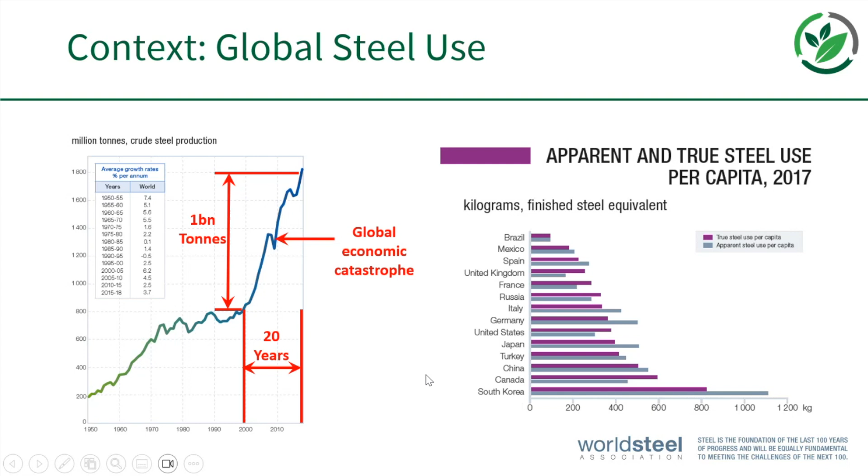And as we move into a transition to new technologies, we're going to continue to need steel as we embark on a whole series of very large infrastructure projects and to support new technologies to deliver the green transition as well. In the UK, that means that we're going to have a very sort of stable demand for this material into the future. There are, of course, then on the back of that, industrial developments.

So I've picked out, obviously, the very well publicised transformation of the Port Talbot Steelworks from an integrated steelmaking operation to an EAF-based steelmaking operation. And I think those of us who work closely with the industry also recognise that these sorts of transformations have been occurring in a lot of other jurisdictions well ahead of the UK, particularly the US.

One of the things that I've always said is there's never been a more exciting time to work with the steel industry. And there are a lot of opportunities for people to get involved and contribute to the success of that. Lots and lots of fundamental scientific challenges along the way.

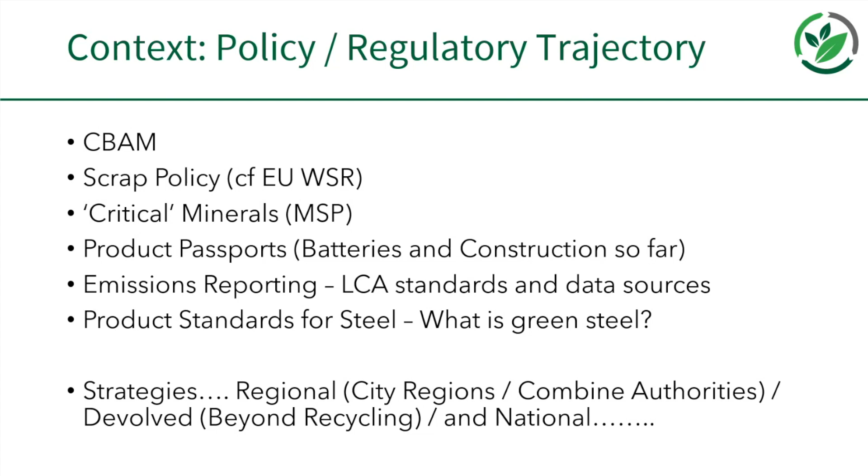But we will also have, and this is the critical thing, the UK Steel Strategy. I thought I would frame my talk in the context of this, because the UK Steel Council was recently reformulated and met this week. And the steel strategy will be completed by April, and I thought that deserved a sort of eek emoji, because to me that sounds like an incredibly complicated and detailed piece of work that needs to be completed extremely quickly. Obviously, people have been thinking about this for a long time.

And what I thought I'd do, having been involved in some of the prioritization and development of things that might be going forward for the steel strategy, is give you a sneaky peek of what that might look like. So there will be some subgroups developed, which will include some of us in the academic sphere, but also a whole range of other stakeholders from industry and government. And they will be looking at things such as, and I'm calling this indicative because I don't believe this has been published or finalised, procurement.

So that's looking at the whole supply chain for steel and how do we produce the products that customers need in the future. Raw materials, so particularly a focus on scrap, but also let's call them iron units, which could be DRI, or pig iron, or granulated iron, or the ore itself, of course.

Energy, so yes, availability, but critically what vectors we're going to use. So there is a clear move towards electrification within the UK, but we also need to consider the chemical vectors, and we're displacing a huge amount of chemical energy with electrical energy by moving from an integrated steelmaking process to an EAF process.

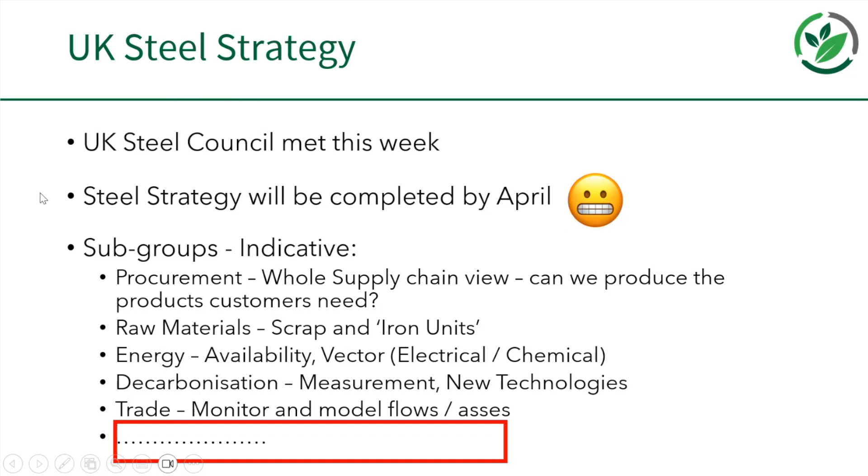So this is the sort of the context. And so what I wanted to think about was, well, if we look at these things of procurement, raw materials, energy, decarbonisation, what is it that we're doing in the academic sphere that's going to be able to contribute to that, and how will it fit in with whatever this published steel strategy happens to be? And we'll find out very, very soon.

So I'm going to draw on my experience of leading the SUSTAIN network. I'm very keen on pointing out that it is a network, so it stands for Strategic University Steel Technology and Innovation Network. And I've always been very focused on making sure that we bring together as many different players across the academic sphere as possible in joining this, and we continue to grow the partnership through new funding calls and things like this.

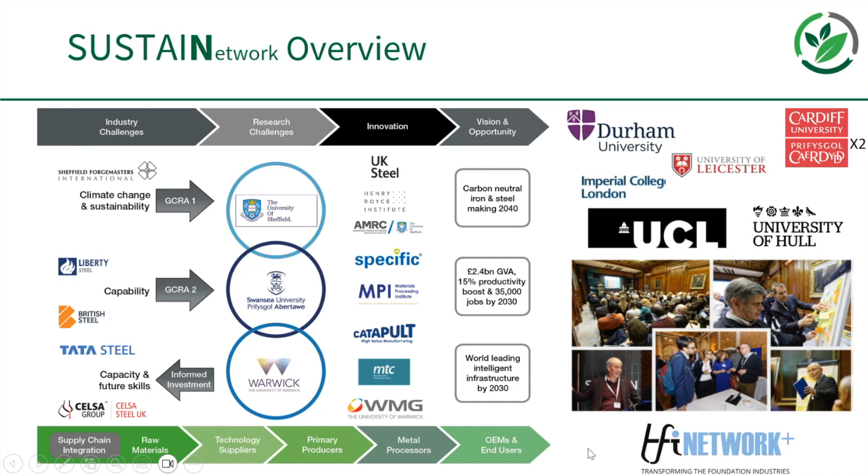So this is kind of what it looked like to start, but we've now engaged through a whole series of networking events and funding calls with a whole series of different other universities across the UK who have got valuable contributions to make inside this space.

To give you an idea of how we're doing that, we continue to fund new partners. We've just awarded, I think, 3 new feasibility studies. I'm going to struggle to remember exactly where they were funded off the top of my head because it's literally hot off the press, and perhaps I shouldn't announce it here, but we've just funded 3 new feasibility studies, 2 of which I know sit with new partners and new universities that we haven't worked with before within the SUSTAIN network.

And this is one of the things I'm most proud about within SUSTAIN, an early career researcher call, which is specifically to fund researchers who are not eligible to apply for EPSRC funding under other circumstances. And we have a whole series of applications which are currently under review. We completed the interviews for those, kind of similar to a fellowship process, at the end of last year.

And we also have a technology transfer fund, which anybody who has received any form of SUSTAIN funding in the past, and there could be those people on the call, can pitch into to try and look at how they might be able to demonstrate the opportunities to take forward some of their work with industrial partners. And any more information on all of this can be found here in calls, and you'll see what we've got coming up in the future.

The research within SUSTAIN sits under 2 grand challenge research areas, one of carbon neutral iron and steel making and one of smart steel processing. The idea being that this one delivers a sustainable foundation on which we can grow an industry, and this one is about how we ensure competitiveness across that. And of course, we have a relatively fluid transfer of different ideas across these.

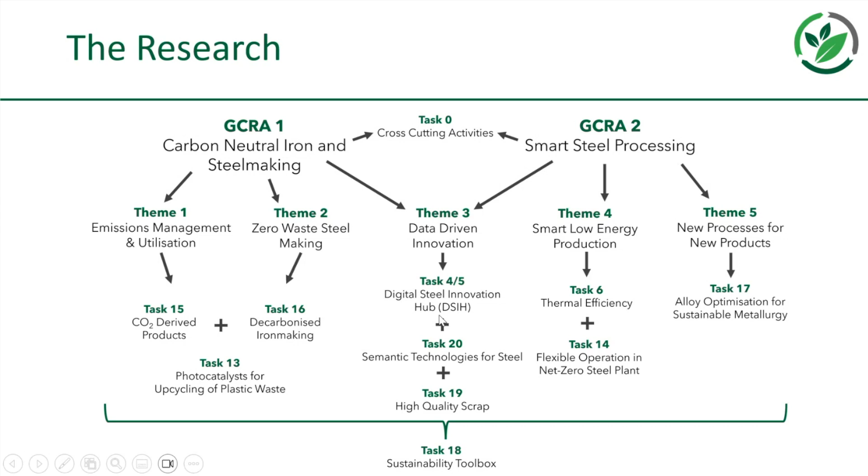So that's what I know. It's not the limit of everything that's going on in the UK by any stretch of the imagination, but I thought I would look at what I know and draw on some things there which might provide some impetus or some inspiration on how we might be able to contribute to successfully delivering this future steel strategy within the UK. So thinking about procurement, I thought about that from the perspective of sustainable metallurgy.

So yes, there is a view within government that we need to make sure that more businesses within the UK buy more British steel, and we need to incentivise them to do that on the basis of the fact that we should be producing, and again, this is a difficult definition, greener steel within the UK than perhaps some of our competitors once we've transformed the industry.

That is really dependent on ensuring, of course, at a fundamental or at a scientific level, that we're delivering the properties for those steel products that the customers actually want. So there's no point in forcing them to buy something terrible simply because it's from the UK. We also need to make sure that we're competitive and we're developing these high value products.

So there's a lot of people within the Sustain Partnership who are working on that, many of whom are within the WMG team themselves and some within Sheffield as well. And I do have to apologise that some of these slides might not necessarily be entirely up to date. And so if you don't find yourself on these, please don't take that as a slight from my perspective.

There's a big challenge associated with sustainable product metallurgy, which is related to the scrap. Now, I want to talk more specifically about the management of scrap a bit later on when we come to talk about raw materials. But just in terms of what this means for products, we have this excellent track record of developing new products within steel.

Not more than 5 years ago, the aluminium guys would look over the fence at us and be extremely envious about our ability to produce thousands of fantastic new grades on an ongoing basis, and we've been very, very good within our industry at developing new novel products with increasingly good combinations of, say, for example, mechanical strength and ductility.

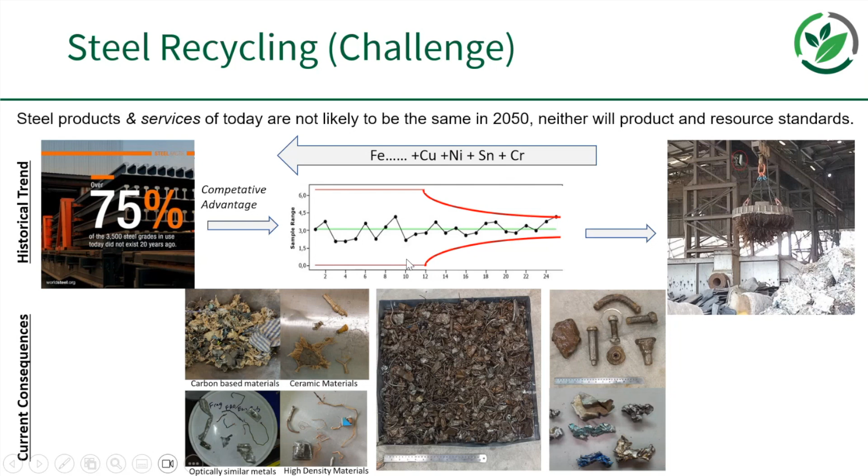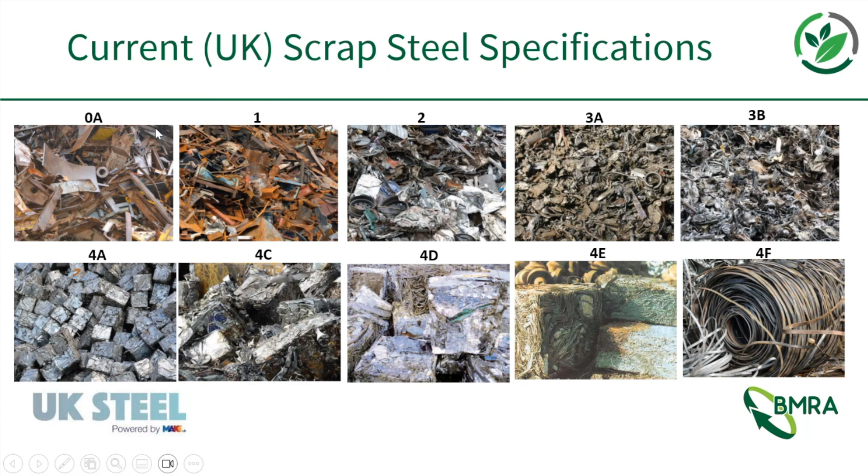This isn't helped by the fact that if you look at some of the scrap specifications that currently exist for the UK, these are them essentially. So they do produce some indicative compositions, but they're generally done by the look of the material itself, and that's kind of how scrap is graded. That's something we need to change, obviously. So we need to stop chucking stuff in a big pile.

We need to stop recirculating these elements coming back through the thing, and we need to think more carefully about how we actively manage those resource flows through more knowledge of the materials that we're generating and passing that data through the supply chain. We talked about passports before that might be able to enable reuse, repair and remanufacture of materials,

but also to look where we are recycling them and remelting those materials and sending the elements where they need to go. So we take relevant parts, in this case of an auto body, and we know what the compositions of those are, so we send them back to where they need to go. And this basically means that we need to start thinking more carefully about robust and differentiated products.

So we've been focusing entirely on differentiated products, and very successfully too, in the recent past, but we need to now understand how we're going to make them robust. And the purpose of that is to open up this control chart. So better management, so we get less variation, but also slightly more robust and easier to produce products that open up this control chart and make life a bit easier. To produce them and handle those subtle variations in chemistry that might be coming through from higher rates of recycling. And this essentially is what we need to do.

Now, on this side, let's talk about sustainable metallurgy. There is some work which you guys are doing. So again, I'm not here to talk about any of the individual research areas in detail, but I just want to draw your attention to what you're doing and how important it is.

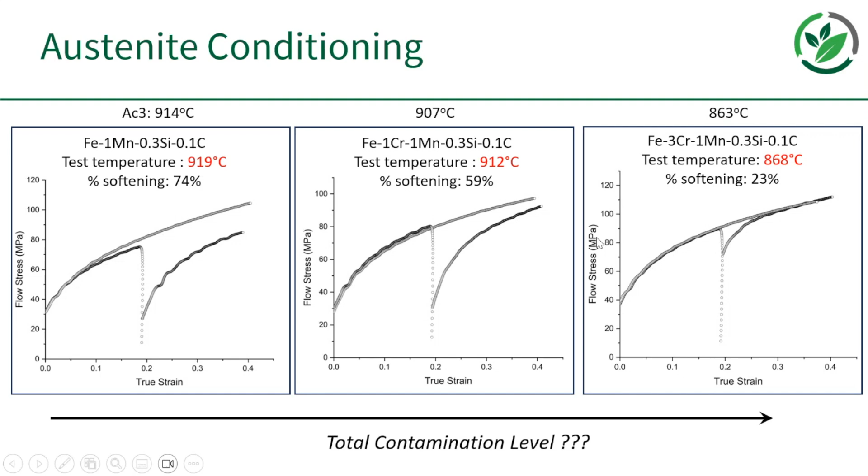So this is some work looking at austenite conditioning and some fairly conventional flow stress changes as a function of different levels of contamination. So if we start to contaminate materials more, then we start to get lower fractions of softening, so higher recrystallization temperatures, and that makes the design of the alloys change as a function of different levels of contamination through different residuals. And I know that there's work going on within the Sustain group at the moment, which is looking at how you might be able to reconstruct that austenite grain structure.

So using things like EBSD and the orientation relationships that exist through EBSD to be able to recharacterize those austenite grain structures and start to define or correlate some of the observations that we're seeing with regards to changes in the recrystallization behavior as a function of different contaminants in the steel with the structure of those grains. And so this and any of the work that you're doing in this area that's looking at these changes as a function of composition, changes in composition for copper, nickel, tin, or chrome in particular are going to be extremely valuable. So this is one way that you can look to address this.

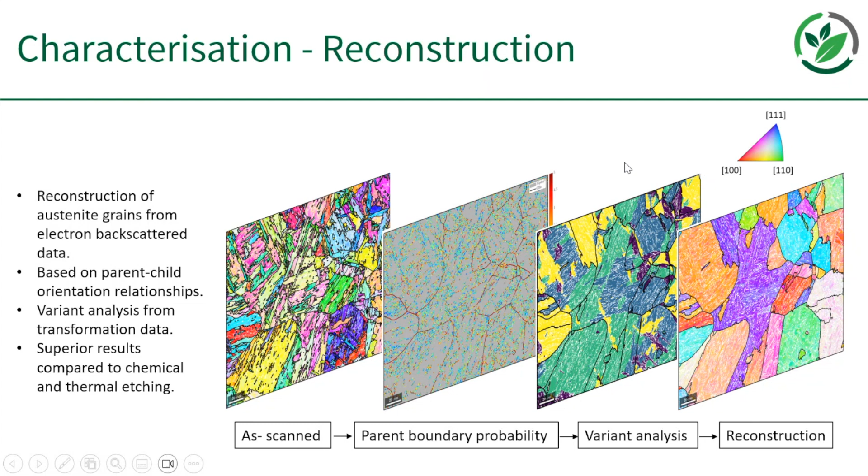The other way, which has been used a lot in the past, of course, is by looking at these high nickel model alloys that maintain austenite structures. And this is some work that Carlo, I think, is on the call, has been looking at with his colleagues at WMG, where we're looking at how different strain distributions exist for different recrystallization temperatures and conditions, and thinking about how those will change as a function of different contaminations.

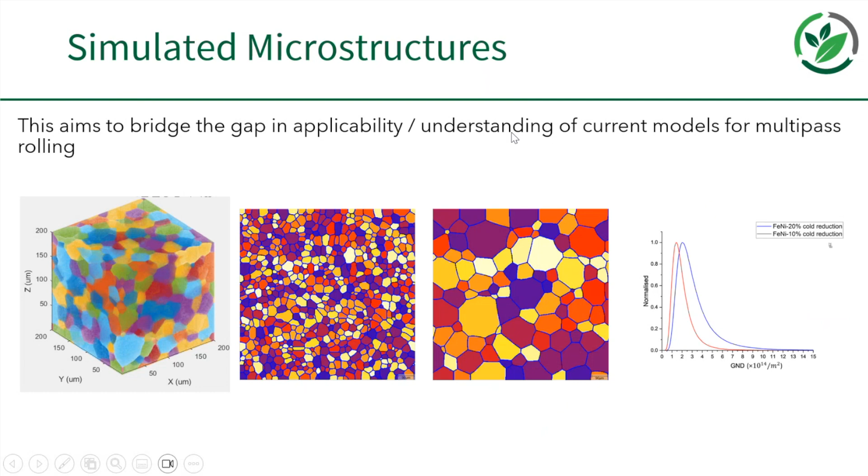So all of this stuff fits very neatly into the case for changes in procurement, and that's backed up then by looking at the opportunities to simulate microstructures, look at the grain size distributions that are popping out as a result of those different microstructures, and bringing that all together. Other work that you guys are doing in WMG that's very relevant to this, of course, and you'll be familiar with this, but I'm just talking about the context here.

Sorry, I seem to have pixelated Fanfu there, my fault.

Is the work around metallurgical sensors. So yes, we are looking at how we can model and understand this change in the metallurgical behavior, but then also you guys are doing a lot of fantastic work looking at how you might be able to validate and measure that behavior through projects that are occurring within Sustain and beyond, funded through the Catapult and other EPSRC projects. Looking at how you can then monitor that on an ongoing basis and then validate the observations that you guys and we collectively in the academic sphere are making on these changes in recrystallization behavior as a function of different residual elements, and actually being able to assess that.

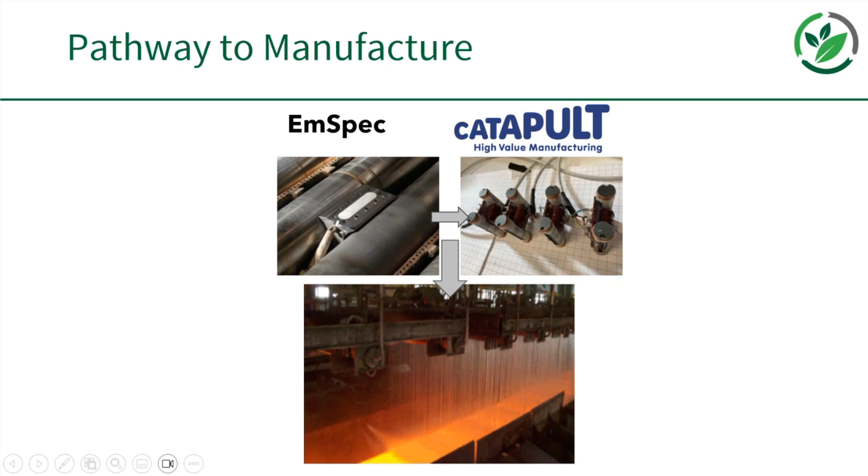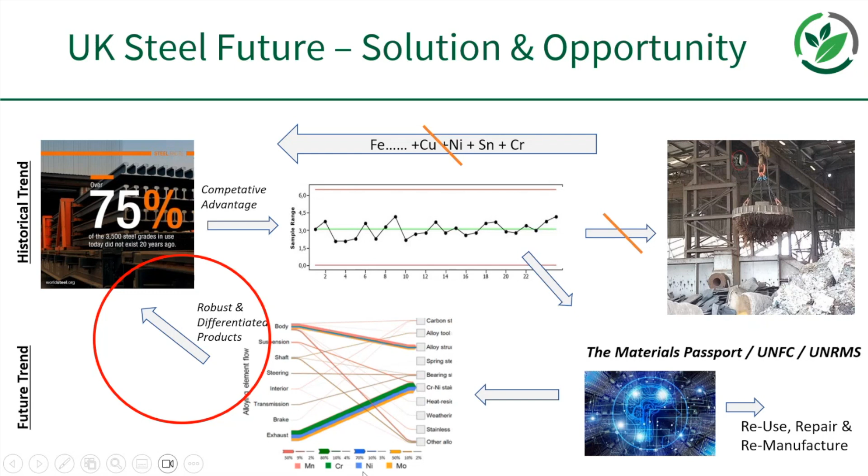So we can use this for the existing portfolio of grades, but this sort of technology is also going to be really important in terms of being able to monitor and actually deliver that. And I'm going to do a bit of scrolling now, which you're not supposed to do in presentations like this, but I'm in charge, so I can, which is going to be really important in terms of opening up this control chart. So one of the things that we can do, of course, is deliver better levels of control on the processes that we implement. And if we can do that, then that gives us this more room for maneuver and gives us this opportunity to produce a wider range of grades with higher recycling rates.

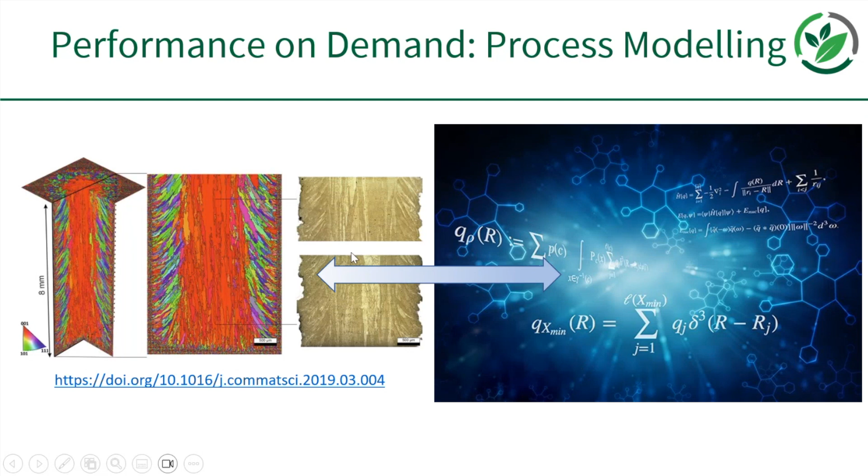So in some cases for process-related stuff, which has large volumes of different potential variables, then it might be more like this. But in some cases, of course, we might find it's just as easy to solve some of these problems with some of the original empirical equations and constitutive equations that we've used to derive relationships in the past. Things like substitutional alloy effects on strengthening, for example. But this bridge between the two and deciding which of these are the best methods is probably going to be really important.

So thinking about energy as the next sort of phase of the steel strategy, or one of those subgroups that's going to be really, really important, we can think about this electrical component. Now, this is one of those cases where we're basically looking at modeling the operation of an entire EAF-based steel plant with all of the different processes and intricacies that go on. Now, trying to deal with that from a physics-based perspective is going to be extremely challenging, if not entirely impossible. But some work at Cardiff University has looked at a way of being able to schedule the electrical use.

So if we're going to convert to electrical-based production, we don't have an infinite supply of electricity in the UK, at least for the time being, and probably for a long time into the future. And so we need to be extremely smart on how we use that. Also, particularly because our prices for electricity are significantly higher than many of our competitors in the global market, including the EU. So we really need to think carefully about how we're going to use that energy, and there is the opportunity, as presented by some of this work that we funded at Cardiff University, to look at digital twins, to do day-ahead and intraday scheduling, to look at how we can reduce the demand on the system.

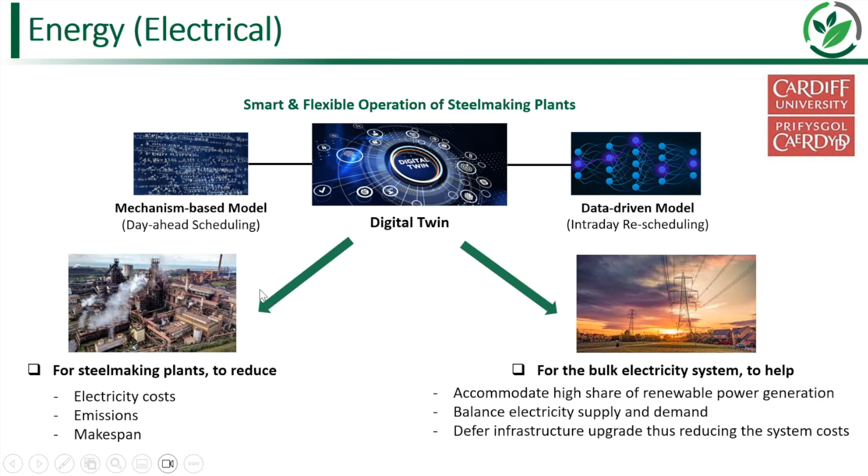And this one specifically was looking at not just the conventional grid as it currently exists now, but the opportunity to fit in more with the potential trends that we might see with renewables, where the wind is blowing or the sun is shining. And so this sort of demonstrates one of those areas where that data-driven approach is really probably one of the only ways that we're going to be able to do this successfully, because it involves lining up a whole series of different processes, each with its own variables and key parameters that need to be managed in order to deliver this optimized demand on the electricity grid.

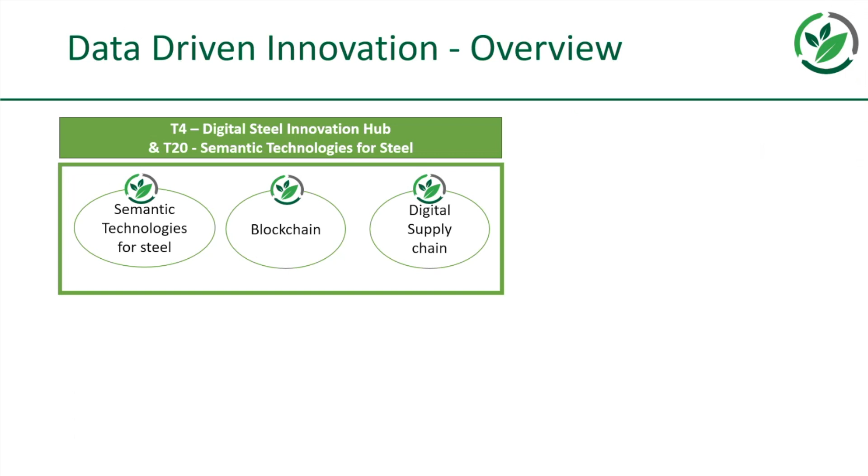Within Sustain, we're kind of looking at this on a holistic basis as well. So there's some core work within the area looking at a whole series of different things. So the modeling, or the conventional modeling that we're talking about just here. There's some of the life cycle analysis, which I've touched on already at a very high level, and we'll discuss in a little bit more detail later on. And then you've got some of the data that will be maybe coming in through the supply chain and how that might be secured through things like blockchain or distributed ledger technologies.

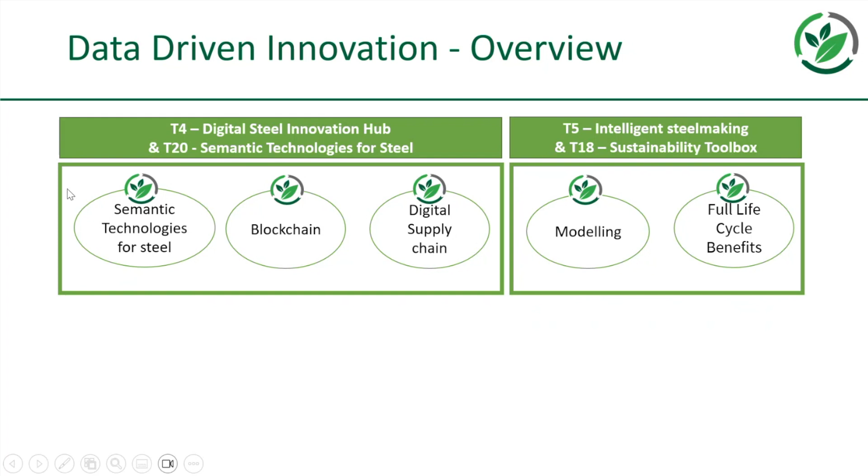But also considering, and I did see Harry join the call, I was somewhat inspired by a talk that he gave, I think it was his Bessemer lecture, when he had a conversation with an AI during the lecture, which I thought was very inspiring, and that's something that we've been looking at as well. So the opportunities to use what are called semantic technologies. So those are technologies that can, like, think ChatGPT, go in and query data on our behalf and find a way of making some of these models more human-centric. Because I think with some of these data-driven models, one of the biggest challenges is trust.

And we need to be able to see those things working, or be able to interrogate them in ways that are better than they are now, because they currently kind of sit as a black box. And the idea is that all of these things will kind of feed together to produce something like materials as a service.

So we want better performance on demand. We want better sustainable materials and steelmaking processes. We want to be able to trace some of the data that exists through the supply chain. And we want then to be able to distribute that data so far as we can across the supply chain, which is going to enable better use of the materials and more efficient use of the material.

A large quantity of steel never actually makes it to the final customer through things like machining and forming and such like. But also longer use of those materials, and then the potential to reuse those materials when we get to the end of life. But that's going to be dependent on getting better predictive data and measured data from these advanced sensors to travel with the material through its life cycle.

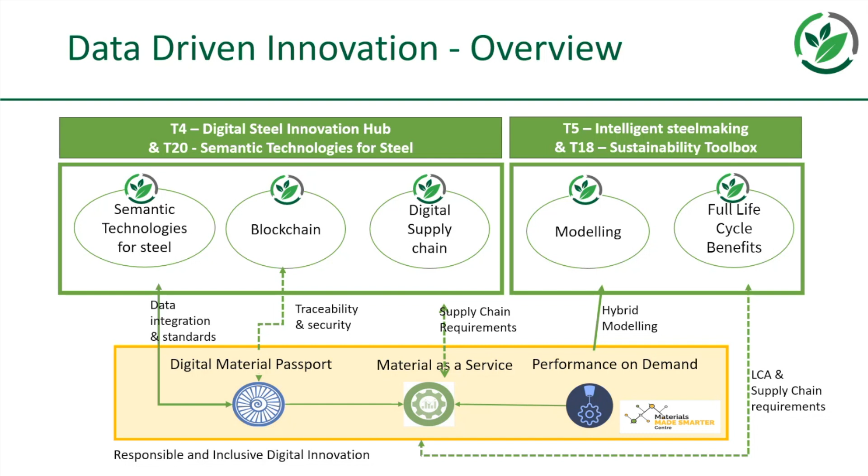And then that should enable us to make better choices, informed by life cycle analysis, on what are genuinely the lowest carbon uses of the material, as well as the lowest carbon production methods of that material.

Thinking about the other key variable of energy, it's really that chemical energy. And I alluded at the very beginning to the fact that we are quite bravely, I would say, looking at electrification as the savior of steelmaking, even though the EAF is a far more mature technology than modern integrated steelmaking. And the big challenge of that is that we're displacing huge volumes of chemical energy in the form of coke, coal, solid carbon, with electrical energy, which we're still trying to find a way of being able to produce at significant scale.

Even if we're able to successfully do that, I think that's possible at the UK level because we're a relatively small player. But if you look at that at the international level, that's going to be a huge challenge. But even if you're able to actually do that, then you need to start thinking more broadly about the carbon cycle. So we're not just thinking about CO2 as the gas, but we're also thinking about its whole life cycle through the production of solid carbon all the way through to its utilization, combustion, and then potentially catalytic reduction as well, which I'll come on to.

So I've stolen this slide from one of our collaborators at Liberty Steel. This is Ed over here. And he presented some work that he'd done analysing what the carbon footprint looks like at Liberty Steel. And don't forget that Liberty Steel are already an EAF manufacturer within the UK.

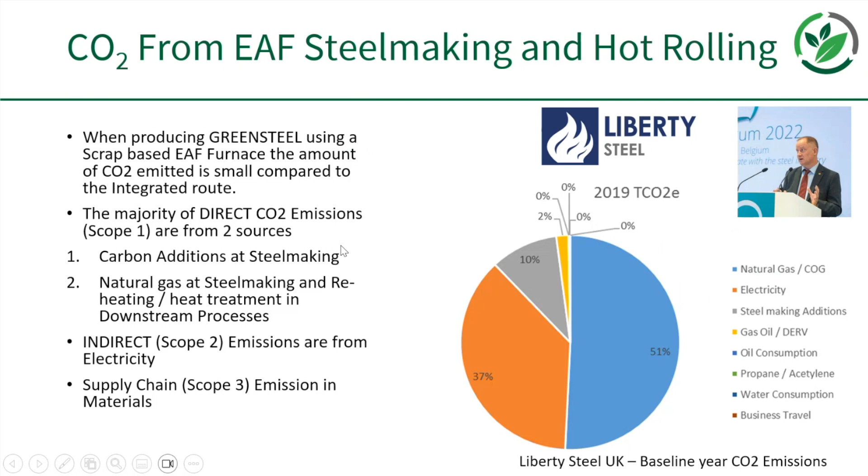I'm happy to share these slides because I appreciate I'm having to go relatively quickly, but you can have a look at this data at your leisure or review the recording.

So basically, we're still burning a lot of gas even once we've completed the transformation to electric steelmaking, and we're also still using actually quite a lot of solid carbon. And although in total it doesn't make up a significant proportion of such a large total amount of CO2, it makes up a very significant proportion of the CO2 that's generated for EAF-produced steels.

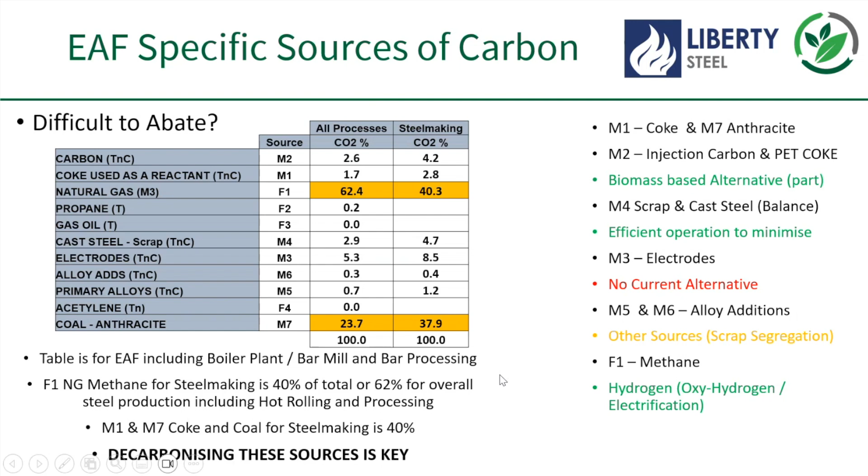So we need to think about what alternatives we might be able to use that reduce this, and two options that are being looked at by Peter Holliman at Swansea, Julian Steer in Cardiff, and various others across the UK outside of Sustain as well, are looking at either waste products and how they might be able to be used as supplements for anthracite and mined coal, but also a biogenic carbon as well.

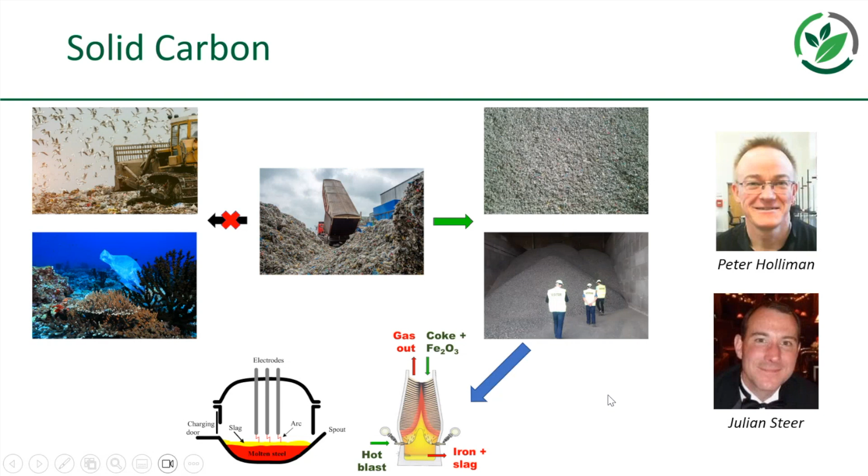So the options to sustainably grow biochars in ways that actually remediate carbon from land use, as well as having a net benefit within the steelmaking process itself. And from the perspective of continuing to burn gas or produce CO2 through the EAF process, we also need to think about that other end of the carbon cycle, which is the emissions of the gases themselves. And that's some work that's been done here by Sheffield University.

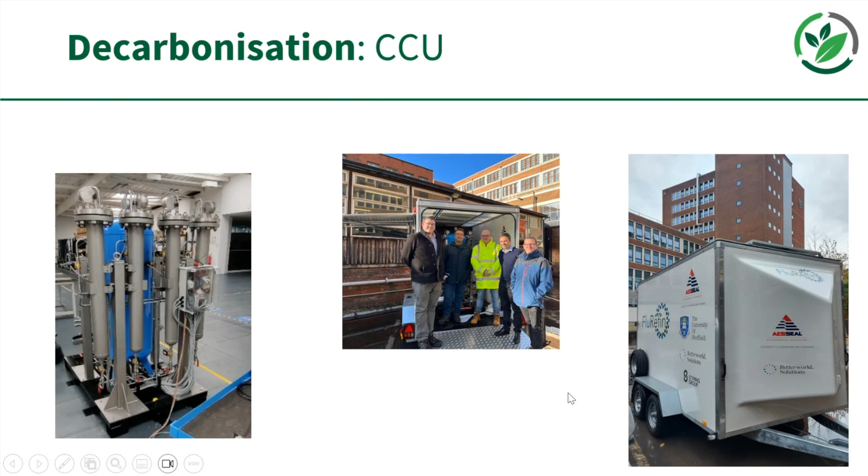So this is a demonstrator that we've built through Sustain in a collaboration with Sheffield University. And this has been doing a tour of the UK steelmaking plants and being plugged in. So this is the reheat furnace at Brinsworth, for example, being plugged into various different parts to look at the efficacy of this very low energy alternative to the current amine technologies for carbon capture or capture of those residual gases. And this has proved to be very successful.

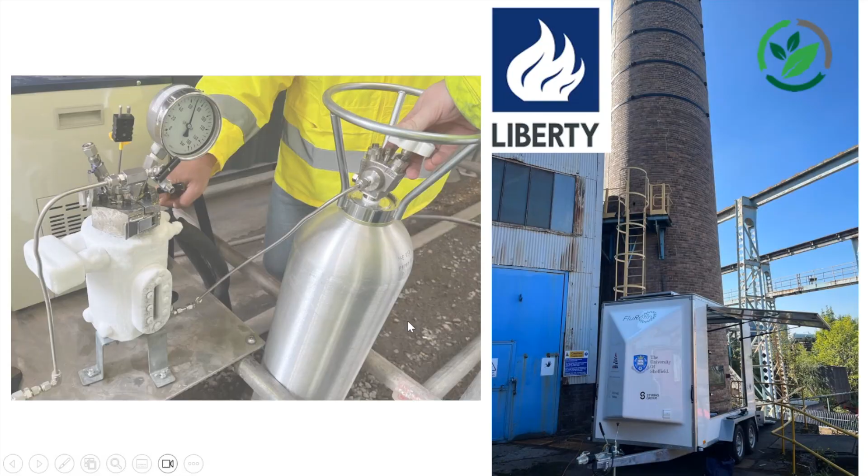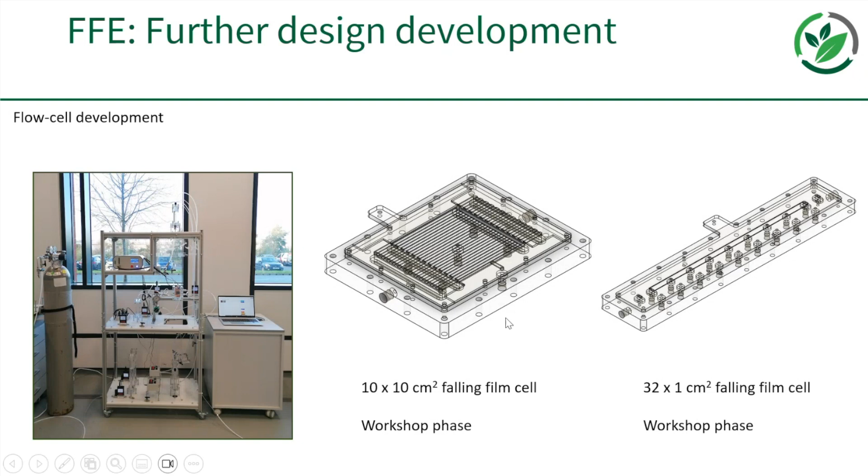And this has been complemented by work both at Sheffield and at Swansea. So at Swansea, they're looking at electrolytic conversion through falling film electrolyzers, which are actually already quite well advanced in the chloroalkali production process, so can be scaled, and thermocatalytic conversion at Sheffield University as well, looking at producing new products. And we've been able to scale this pretty successfully, doing these plant trials, but also working with potential customers of these carbon products as well.

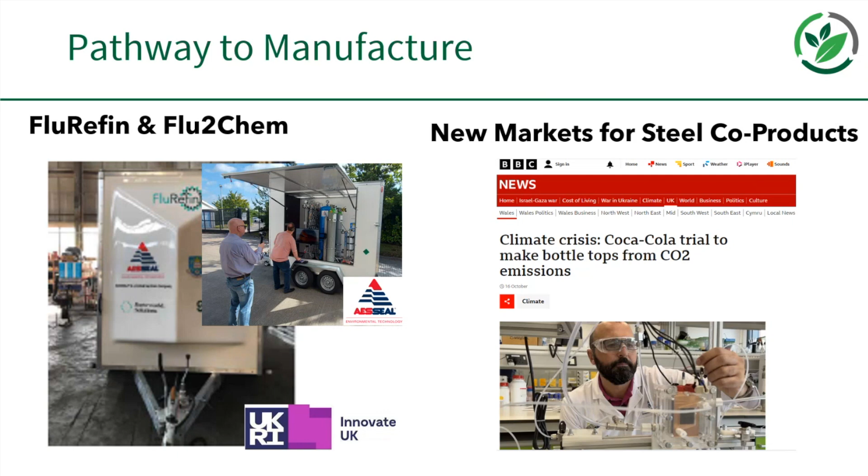So thinking about how steel can be part of the solution in terms of providing low CO2 work. And in Swansea, we've been funded by Coca-Cola to make bottle caps, which is a drop in the ocean, really, of course, but is an interesting way of looking at potentially establishing new supply chains using the gaseous products that come from steelmaking. And the last thing that I wanted to talk about from a technical perspective is raw materials. So that also sits on the steel strategy agenda.

And those of us who've been thinking about this a lot will know that there's essentially one key alternative to the blast furnace which is being touted at the moment, which is hydrogen DRI. Yes, there are others, molten salt electrolysis and things like that, which are being discussed, but the primary one that's being looked at the moment is DRI.

The other thing that you need to think about there is not only how much DRI you actually need to use and what the total demand is, but then also how much supply of DRI quality iron ore is there available to us that would be able to be used in a conventional shaft furnace. And that is actually relatively low.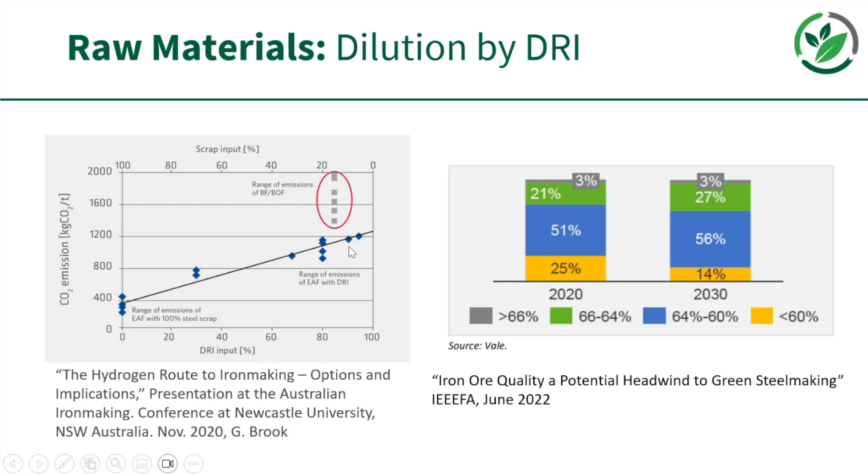So this is quite a complex problem, and it's going to be mostly solved where we have availability of scrap material, which is a big question because there's a huge deficit globally against the demand for steel, on the quality of scrap that we're putting into the process. So the level of dilution that we're going to need as a function of the iron unit part of the raw material input is going to be a strong function of the quality of the scrap that we're actually producing.

Now, if you look at the UK and you just do a basic inventory of the material that we've produced and consumed through imports within the UK, you can see that about 70% of it should be really, really low copper. And only a small fraction of it should be at higher levels of copper, which if you look at this diagram here, which is more suited to the levels of residuals for the US, this is a US derived diagram, I should say, then you can actually see that we should be able to produce the vast majority of materials from almost 100% scrap. And that would give us a huge carbon benefit as we have been able to calculate.

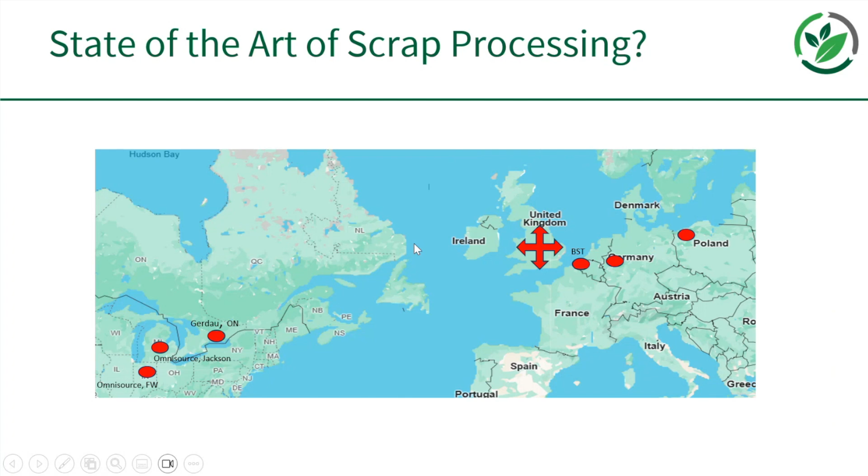But if you look at this in detail, we've gone out and looked at the different behavior of the scrap management processes in different jurisdictions across the world and pulled together what we're calling the international state of the art with regards to scrap processing. And what we found is, if you look at the UK compared to Western Europe, because they've been on this journey, and I alluded to this earlier on, within the US for longer than we have here, about 30 years ahead of us, to be honest.

They have been doing this sort of dilution at the minimum level per product specification. So rather than necessarily looking to the future and thinking, right, what happens at the third, fourth, fifth generation of materials that might be recycled as they come to the end of their life, they've been thinking, how do we hit the minimum residual level for this product now, this product now, this product now? And those decisions may have been taken 20 years ago.

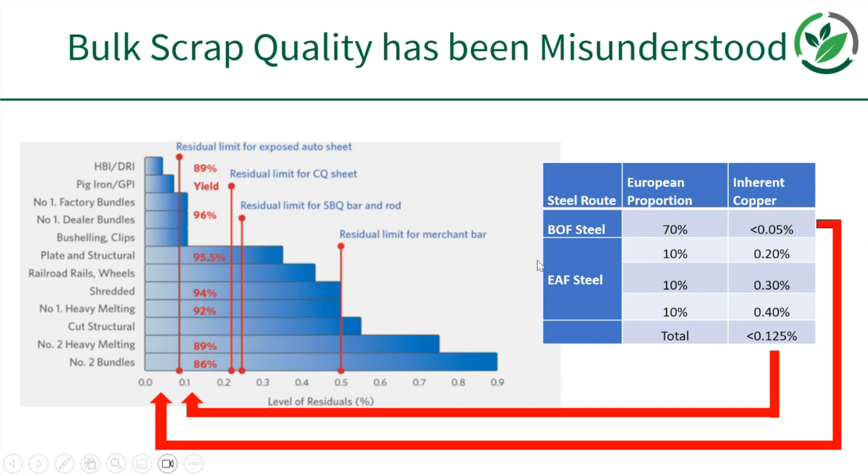The problem is that as those materials now come to the end of their life, they're starting to get large, what we will call intrinsic contamination. So contamination that is actually, in this example, copper, but it could be any of those key elements that we want to avoid reintroducing into the supply chain. That copper is actually now baked into the material, which means that their intrinsic or base load of copper within their arising scrap is now about twice that, if not more, than it is in the UK. That is one of the things that has resulted in a significant investment in scrap processing and vertical supply chain integration within the US of steelmakers and scrap companies as they seek to try to de-risk themselves from this.

And the advantage that we have in the UK is that if we can use all of this knowledge through the grade development and the research that we're all doing collectively within the academic sphere, and we can match it with some of this available technology that we know exists with regards to best practice in scrap processing technology, then we will minimize our requirement to dilute our materials and still be able to produce those grades of very, very high quality.

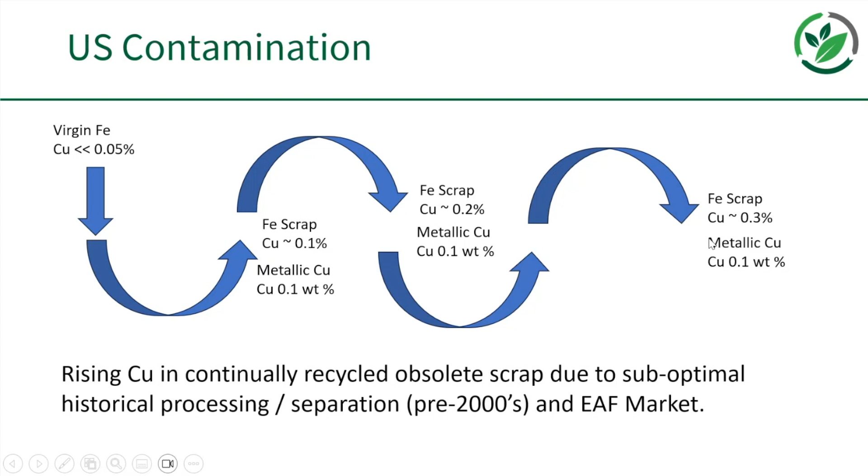And I think this is where all of us within the academic sphere, working across a whole range of different areas, kind of have a role in coming together and demonstrating the art of the possible to those people who are going to be making the decisions as a function of the steel strategy within the UK about what we might be able to do to control those supply chains here in the UK and generate something which is genuinely competitive from a decarbonisation perspective.

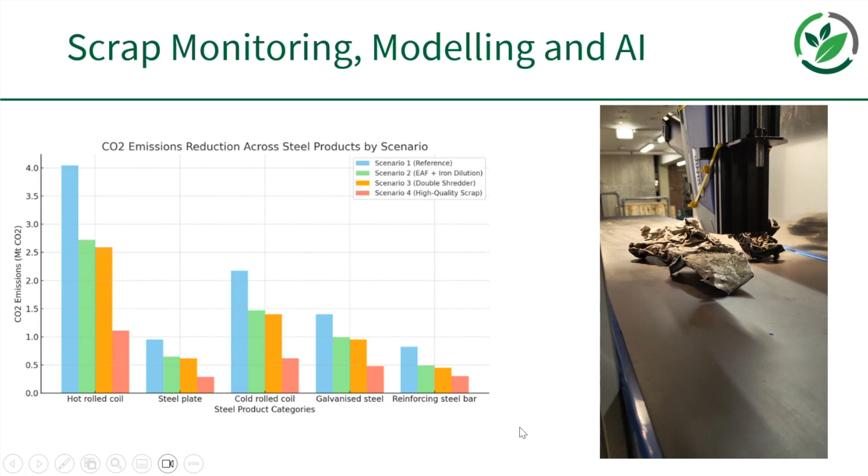So here's a line that we set up in Swansea University, which we've been using to analyse different forms of scrap and image it as well. And we're collaborating with the guys in WMG at the moment on looking at modelling of the scrap flows and AI to potentially identify the composition of different amounts of scrap. And that's one piece of work that we're doing in collaboration with Zushu at Warwick. But another piece of work that we've done as part of an Innovate proposal is start to look at some different scenarios for different products and see what the effect of controlling that scrap supply chain might be on the eventual carbon footprint of the material.

And if we take a sort of a base 10% scrap input condition for, say, hot rolled coil, you can see how that might come down, steel plate, and so on. So you can see that as a function of different product types, this careful control of the scrap content can have a significant effect. And I would also say that if we were able to relax some of the residuals by more robust design, then we would be able to boost these benefits even further, particularly where we're approaching 100% scrap input.

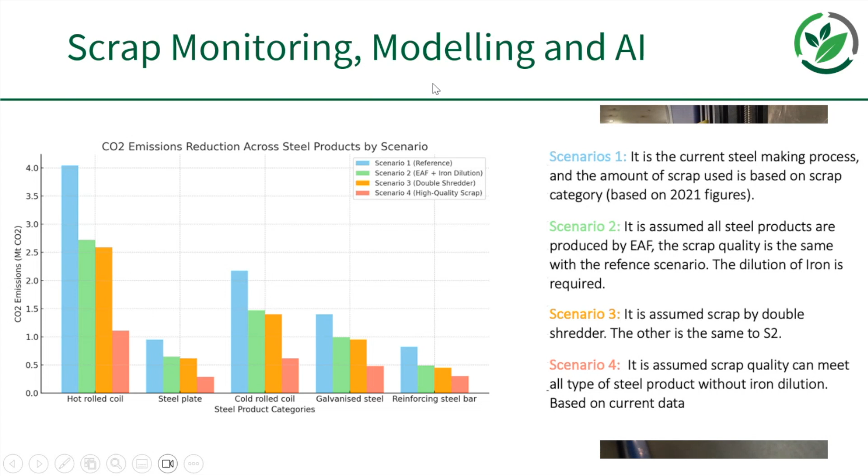And this is basically on the basis of the fact that we're offsetting the input of pig iron produced through unabated blast furnace production. Of course, we might also be solving that problem from the perspective of hydrogen-based DRI or other smelting technologies. But my belief at the moment is that those will not have a significant contribution in the short term, and we are in a race against time with regards to the climate emergency.

So if I revert back then, those are some things to think about in terms of how you can contribute to the steel strategy and make it a success within the UK. And what is the missing but crucial ingredient that I spotted as a potential gap within the steel strategy? And the answer is you, all of you and all of us. I think people and the skills that they have are an incredibly important part of successfully delivering any steel strategy.

These people really are very, very important, and supporting them and connecting them through the development of their careers with the steel industry within the UK, but more broadly internationally as well, is going to be extremely important, and it's probably actually the critical factor in us being able to deliver a successful transformation to, again, I'll put it in inverted commas, green steel production within the UK.

And just to give you an indication of what this means to people as individuals beyond some of the research outputs that they've been able to develop with this research funding, there are people like Pung, Stephen, and of course, very familiar within Warwick, Frank. Stephen now, of course, formerly at WMG, then with us in Swansea and now Coventry. All of these three have gone on to take on roles as permanent academics, working now specifically with the steel industry, and that's something that I'm very proud of as an output of the programme of Sustain, but also very proud for them in terms of their continued commitment to this sector. One of the most exciting sectors that I think you can possibly work in.

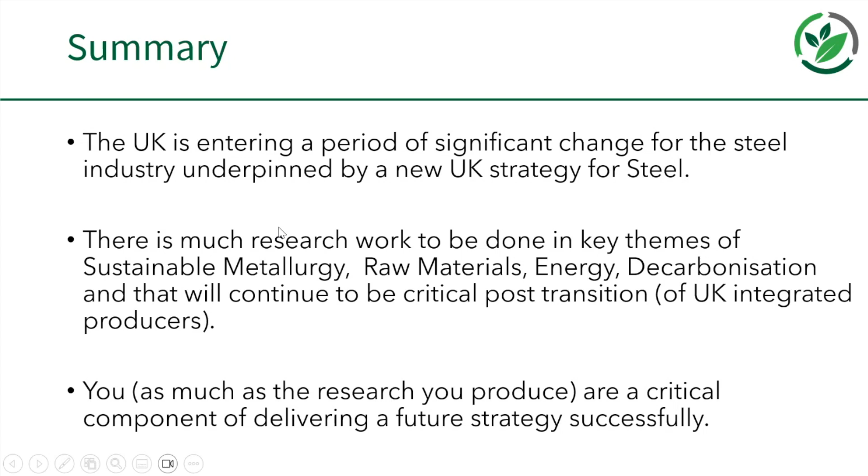Thank you, Cameron, for a nice talk covering various themes of research you are doing under the Sustain Hub with the Sustain partners. And the floor is open for any questions. Yeah, Carl, please. Carl.

Hey, Cam. Happy New Year. Happy New Year.

Forgive me if this is a stupid question because it's only really come to my mind, or if it already happens. When we talk about recycling or circularity within steel, we talk about putting steel products back into steelmaking. Aluminium is infamous for being quite hard to recycle. Is there much in steel circularity where we take the scrap products of other materials?

So obviously iron is a bad contaminant within the aluminium industry. We don't care about that. For us alloying aluminium into steels, do we take scrap aluminium at the moment? And are there other cases of that across the other alloying, or do we still really take ferroalloys as our mix? And therefore, at the moment, when we think about residuals, we think more about copper, tin, chrome, nickel. Should we be starting thinking about, I don't know, magnesium, something like that?